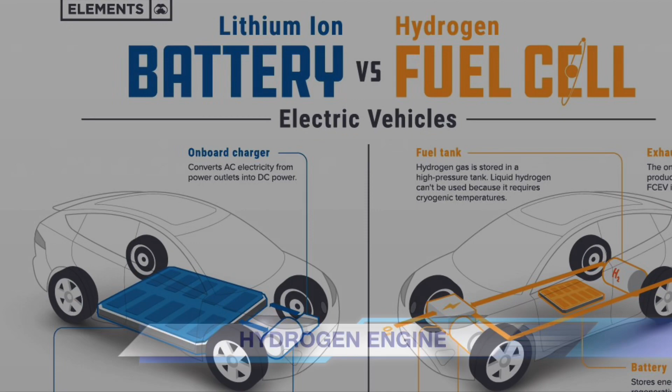Hydrogen engines, also known as hydrogen internal combustion engines (HICE), are a type of engine that uses hydrogen as its primary fuel source. These engines operate similarly to traditional internal combustion engines (ICE), but instead of using gasoline or diesel, they utilize hydrogen gas. A hydrogen vehicle is a vehicle that uses hydrogen fuel for motive power.

Hydrogen vehicles include hydrogen-fueled space rockets, as well as ships and aircraft. Power is generated by converting the chemical energy of hydrogen to mechanical energy, either by reacting hydrogen with oxygen in a fuel cell to power electric motors, or, less commonly, by burning hydrogen in an internal combustion engine.

The 2015 Toyota Mirai is the world's first mass-produced and commercially marketed dedicated hydrogen fuel cell vehicle that is not a modification of an existing model. The Mirai is based on the Toyota Fuel Cell Vehicle (FCV) concept car shown.

As of 2021, there are 2 models of hydrogen cars publicly available in select markets: the Toyota Mirai 2014, which is the world's first mass-produced dedicated fuel cell electric vehicle (FCEV), and the Hyundai Nexo 2018. There are also fuel cell buses.

Hydrogen aircraft are not expected to carry many passengers long-haul before the 2030s at the earliest.

As of 2019, 98% of hydrogen is produced by steam methane reforming, which emits carbon dioxide. It can be produced by electrolysis of water or by thermochemical or pyrolytic means using renewable feedstocks, but the processes are currently expensive. Various technologies are being developed that aim to deliver costs low enough and quantities great enough to compete with hydrogen production using natural gas.

Vehicles running on hydrogen technology benefit from a long range on a single refueling, but are subject to several drawbacks: high carbon emissions when hydrogen is produced from natural gas, capital cost burden, low energy content per unit volume at ambient conditions, production and compression of hydrogen, the investment required to build refueling infrastructure around the world to dispense hydrogen, and transportation of hydrogen.

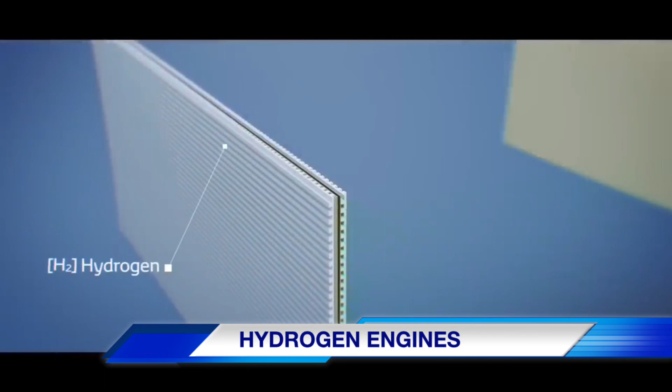A working toy model car runs on solar power, using a regenerative fuel cell to store energy in the form of hydrogen and oxygen gas. It can then convert the fuel back into water to release the solar energy.

Aeroplanes, hydrogen planes. The Boeing fuel cell demonstrator, powered by hydrogen fuel cell companies such as Boeing, Lange Aviation, and the German Aerospace Center, pursue hydrogen as fuel for crewed and uncrewed aeroplanes.

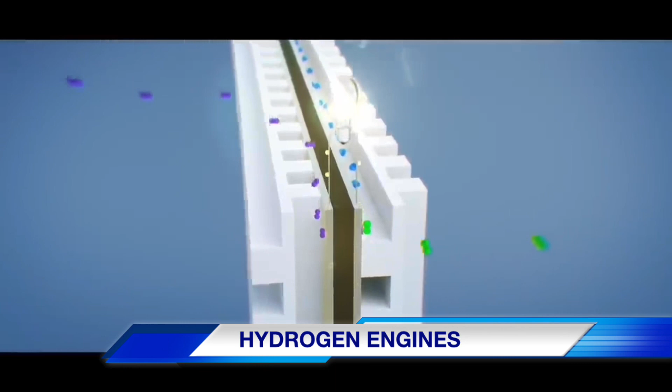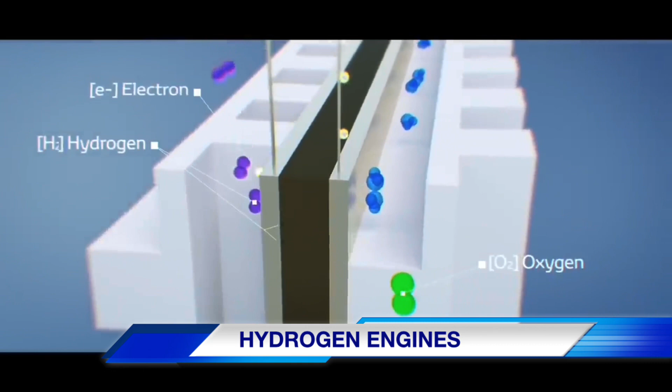In February 2008, Boeing tested a crewed flight of a small aircraft powered by a hydrogen fuel cell. Uncrewed hydrogen planes have also been tested. For large passenger aeroplanes, The Times reported that Boeing said hydrogen fuel cells were unlikely to power the engines of large passenger jet aeroplanes, but could be used as backup or auxiliary power units on board.

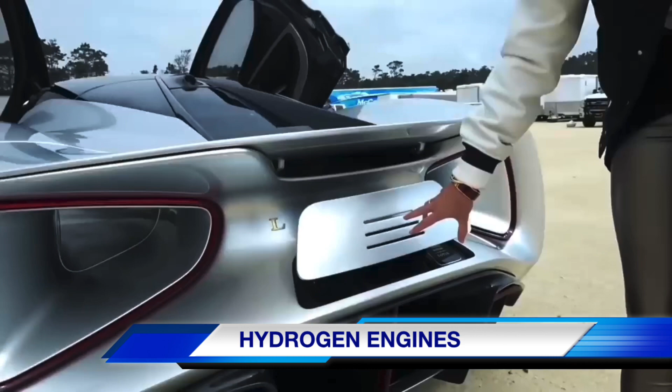In July 2010, Boeing unveiled its hydrogen-powered Phantom Eye UAV, powered by 2 Ford internal combustion engines that have been converted to run on hydrogen. In Britain, the Reaction Engines A2 has been proposed to use the thermodynamic properties of liquid hydrogen to achieve very high speed, long distance, antipodal flight by burning it in a pre-cooled jet engine.

Automobiles. As of 2021, there are 2 hydrogen cars publicly available in select markets: the Toyota Mirai and the Hyundai Nexo. The Honda Clarity was produced from 2016 to 2021. The first road vehicle powered by a hydrogen fuel cell was the Chevrolet Electrovan, introduced by General Motors in 1966.

The Toyota FCHV and Honda FCX, which began leasing on December 2, 2002, became the world's first government-certified commercial hydrogen fuel cell vehicles, and the Honda FCX Clarity, which began leasing in 2008, was the world's first hydrogen fuel cell vehicle designed for mass production, rather than adapting an existing model.

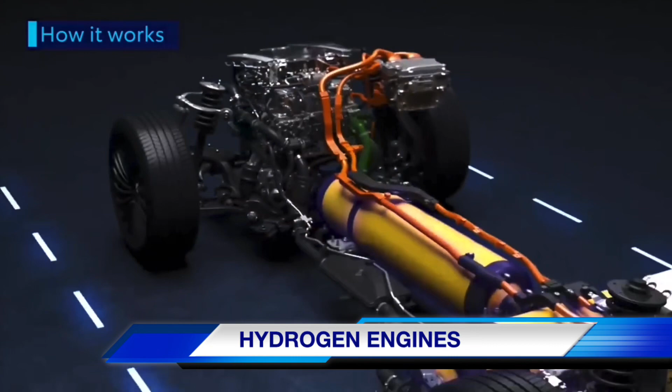Honda established the world's first fuel cell vehicle dealer network in 2008, and at the time was the only company able to lease hydrogen fuel cell vehicles to private customers.

The Hyundai Nexo is a hydrogen fuel cell-powered crossover SUV. The 2013 Hyundai Tucson FCEV, a modified Tucson, was introduced to the market as a lease-only vehicle, and Hyundai Motors claimed it was the world's first mass-produced hydrogen fuel cell vehicle.

However, due to high prices and a lack of charging infrastructure, sales fell far short of initial plans, with only 273 units sold by the end of May 2015. The Hyundai Nexo, which succeeded the Tucson in 2018, was selected as the safest SUV by the Euro NCAP in 2018.

Toyota launched the world's first dedicated mass-produced fuel cell vehicle, the FCV Mirai, in Japan at the end of 2014, and began sales in California, mainly the Los Angeles area, and also in selected markets in Europe: the UK, Germany and Denmark, later in 2015.

The car has a range of 312 miles (502 kilometers), and takes about 5 minutes to refill its hydrogen tank. The initial sale price in Japan was about 7 million yen ($69,000). Former European Parliament President Pat Cox estimated that Toyota would initially lose about $100,000 on each Mirai sold. At the end of 2019, Toyota had sold over 10,000 Mirais.

Many automobile companies have introduced demonstration models in limited numbers. In 2013, BMW leased hydrogen technology from Toyota, and a group formed by Ford Motor Company, Daimler AG and Nissan announced a collaboration on hydrogen technology development.

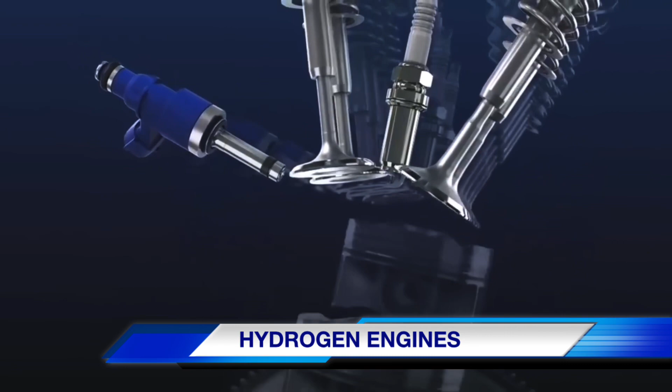In 2015, Toyota announced that it would offer all 5,680 patents related to hydrogen fuel cell vehicles and hydrogen fuel cell charging station technology, which it had been researching for over 20 years, to its competitors free of charge, in order to stimulate the market for hydrogen-powered vehicles.

By 2017, however, Daimler had abandoned hydrogen vehicle development, and most of the automobile companies developing hydrogen cars had switched their focus to battery electric vehicles. By 2020, all but 3 automobile companies had abandoned plans to manufacture hydrogen cars.

Auto Racing: a record of 207.297 miles per hour, 333.612 kilometers per hour, was set by a prototype Ford Fusion Hydrogen 999 fuel cell race car at the Bonneville Salt Flats in August 2007, using a large compressed oxygen tank to increase power.

The land speed record for a hydrogen-powered vehicle of 286.476 miles per hour, 461.038 kilometers per hour, was set by Ohio State University's Buckeye Bullet 2, which achieved a flying mile speed of 280.007 miles per hour, 450.628 kilometers per hour, at the Bonneville Salt Flats in August 2008.

In 2007, the Hydrogen Electric Racing Federation was formed as a racing organization for hydrogen fuel cell-powered vehicles. The organization sponsored the Hydrogen 500, a 500-mile race.

Buses: a fuel cell bus, a Solaris Urbino 12 bus near its factory in Boleslawiec, Poland. Fuel cell buses have been trialed by several manufacturers in different locations, for example the Ursus Lublin. Solaris Bus and Coach introduced its Urbino 12 hydrogen electric buses in 2019.

Several dozen were ordered. In 2022, the city of Montpellier, France, cancelled a contract to procure 51 buses powered by hydrogen fuel cells when it found that the cost of operation for hydrogen buses is 6 times the cost of electricity.

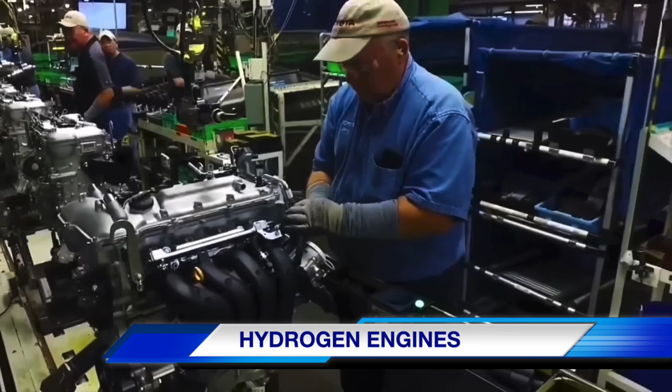Ships: as of 2019, hydrogen fuel cells are not suitable for propulsion in large long-distance ships, but they are being considered as a range extender for smaller short-distance, low-speed electric vessels, such as ferries. Hydrogen in ammonia is being considered as a long-distance fuel.

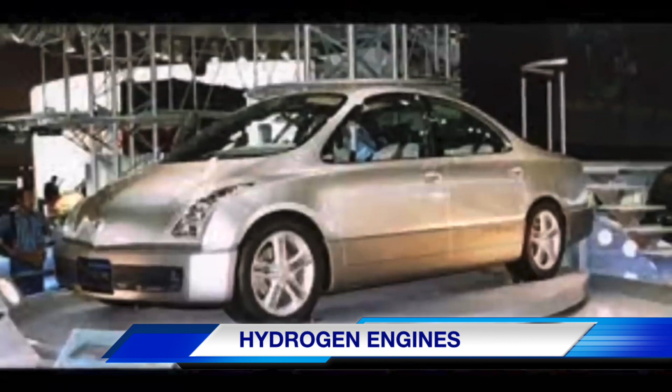Bicycles: the PHB Hydrogen Bicycle, 2007 - Pearl Hydrogen Power Source Technology Company of Shanghai, China, demonstrated a PHB hydrogen bicycle. In 2014, Australian scientists from the University of New South Wales presented their Hy-Cycle model. The same year, Canyon Bicycles started to work on the EcoSpeed concept bicycle.

In 2017, Pragma Industries of France developed a bicycle able to travel 100 kilometers on a single hydrogen cylinder. In 2019, Pragma announced that the product, Alpha Bike, had been improved to offer an electrically assisted pedaling range of 150 kilometers, and the first 200 bikes were to be provided to journalists covering the 45th G7 summit in Biarritz, France.

Lloyd Alter of Treehugger responded to the announcement, asking why go through the trouble of using electricity to make hydrogen, only to turn it back into electricity to charge a battery to run the e-bike, or pick a fuel that needs an expensive filling station that can only handle 35 bikes a day, when you can charge a battery-powered bike anywhere.

If you were a captive fleet operator, why not just swap out batteries to get the range and the fast turnover?

Military Vehicles: General Motors Military Division, GM Defense, focuses on hydrogen fuel cell vehicles. Its SURUS, Silent Utility Rover Universal Superstructure, is a flexible fuel cell electric platform with autonomous capabilities.

Since April 2017, the U.S. Army has been testing the commercial Chevrolet Colorado ZH2 on its U.S. bases to determine the viability of hydrogen-powered vehicles in military tactical mission environments.

Motorcycles and scooters: companies develop electric motorcycles powered by a hydrogen fuel cell, including the Crosscage and Biplane. Other manufacturers such as Vectrix are working on hydrogen scooters.

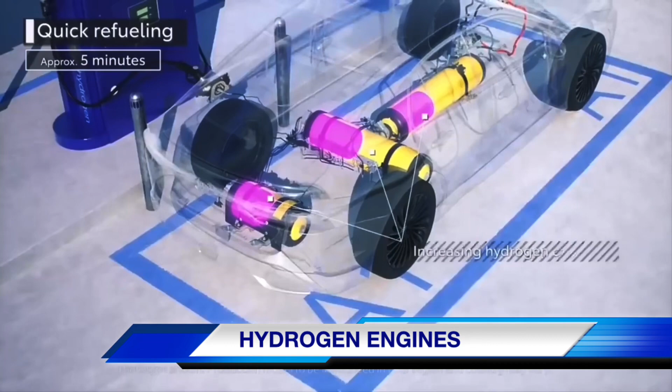Finally, hydrogen fuel cell electric hybrid scooters are being made, such as the Suzuki Burgman Fuel Cell Scooter and the FHybrid. The Burgman received whole vehicle type approval in the EU. The Taiwanese company APFCT conducted a live street test with 80 fuel cell scooters for Taiwan's Bureau of Energy.

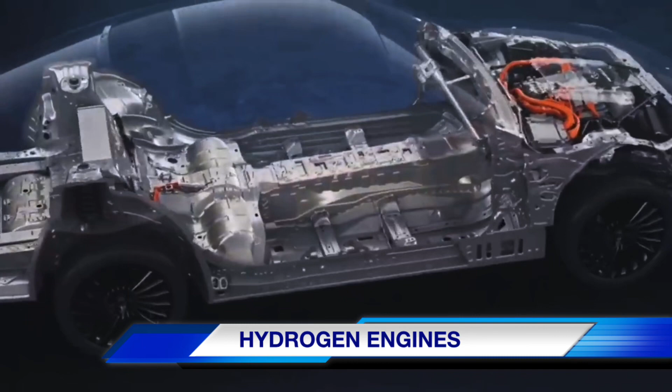In 2013, there were over 4,000 fuel cell forklifts used in material handling in the US. The global market was estimated at 1 million fuel cell-powered forklifts per year for 2014-2016. Fleets are being operated by companies around the world. Pike Research stated in 2011 that fuel cell-powered forklifts will be the largest driver of hydrogen fuel demand by 2020.

Most companies in Europe and the US do not use petroleum-powered forklifts, as these vehicles work indoors where emissions must be controlled, and instead use electric forklifts. Fuel cell-powered forklifts can provide benefits over battery-powered forklifts, as they can be refueled in 3 minutes. They can be used in refrigerated warehouses, as their performance is not degraded by lower temperatures. The fuel cell units are often designed as drop-in replacements.

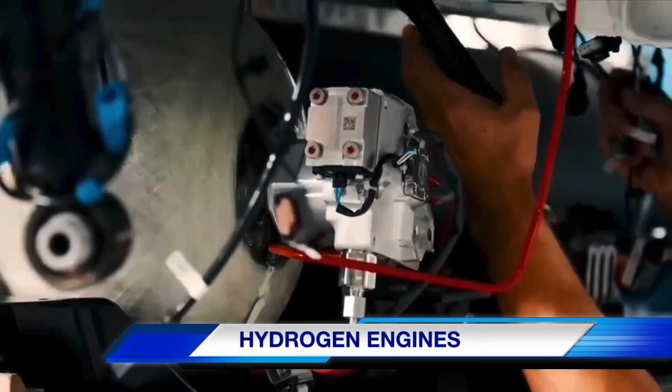Rockets: The Centaur rocket stage was the first to use liquid hydrogen. Many large rockets use liquid hydrogen as fuel, with liquid oxygen as an oxidizer, LH2/LOX. An advantage of hydrogen rocket fuel is the high effective exhaust velocity compared to kerosene/LOX or UDMH/NTO engines. According to the Tsiolkovsky rocket equation, a rocket with higher exhaust velocity uses less propellant to accelerate. Also, the energy density of hydrogen is greater than any other fuel, and LH2/LOX yields the greatest efficiency in relation to the amount of propellant consumed of any known rocket propellant.

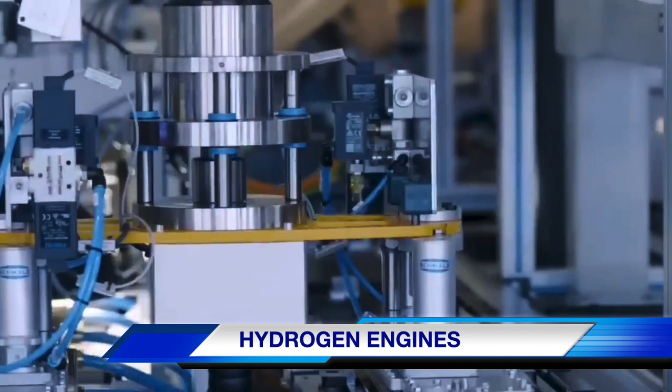A disadvantage of LH2/LOX engines is the low density and low temperature of liquid hydrogen, which means bigger, insulated, and thus heavier fuel tanks are needed. This increases the rocket's structural mass, which reduces its delta V significantly. Another disadvantage is the poor storability of LH2/LOX powered rockets. Due to constant hydrogen boil-off, the rocket must be fueled shortly before launch, which makes cryogenic engines unsuitable for ICBMs and other rocket applications that need short launch preparations.

Overall, the delta V of a hydrogen stage is typically not much different from that of a dense fueled stage, but the weight of a hydrogen stage is much less, which makes it particularly effective for upper stages, since they are carried by the lower stages. For first stages, dense fueled rockets in studies may show a small advantage due to the smaller vehicle size and lower air drag.

LH2/LOX were also used in the Space Shuttle to run the fuel cells that power the electrical systems. The byproduct of the fuel cell is water, which is used for drinking and other applications that require water in space.

Heavy Trucks: United Parcel Service began testing of a hydrogen-powered delivery vehicle in 2017. In 2020, Hyundai began commercial production of its Xcient fuel cell trucks and shipped 10 of them to Switzerland. In 2022 in Australia, 5 hydrogen fuel cell Class 8 trucks were placed into use to transport zinc from Sun Metals' Townsville mine to the port of Townsville, Queensland, to be shipped around the world.

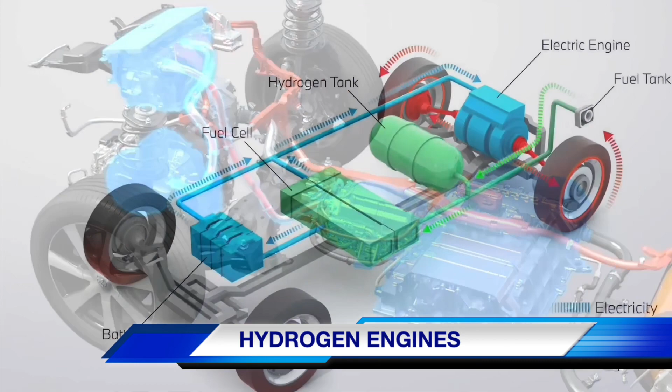Here are some key points about hydrogen engines. Fuel combustion: hydrogen engines combust hydrogen fuel with oxygen from the air, generating mechanical power. The combustion process typically produces water vapor as the only byproduct, making hydrogen engines potentially cleaner in terms of emissions compared to traditional combustion engines.

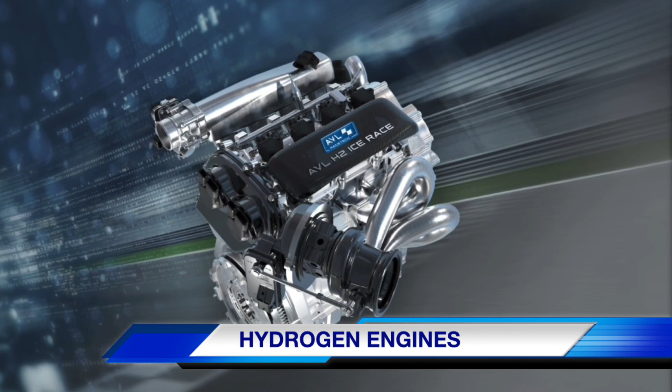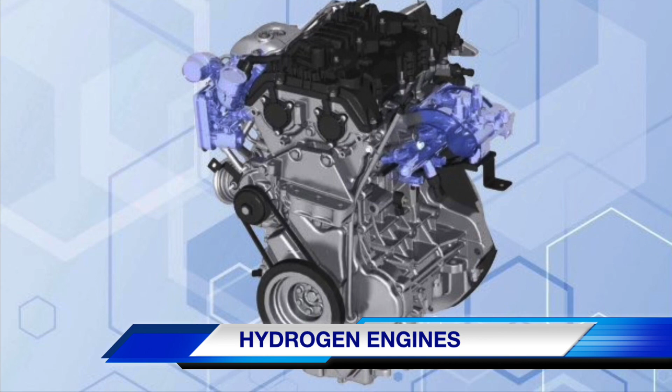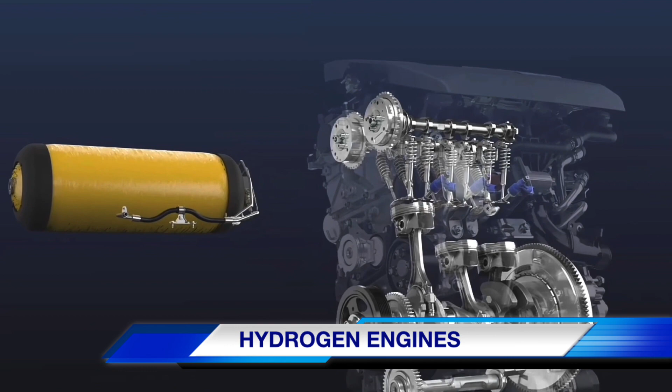Operation: hydrogen engines function by mixing hydrogen gas with air in the engine's combustion chamber. The mixture is ignited, leading to combustion and the expansion of gases, which in turn drives the engine's pistons and creates mechanical energy. Fueling infrastructure: hydrogen engines require a dedicated hydrogen fueling infrastructure to supply the hydrogen fuel. This infrastructure is currently less widespread compared to gasoline or diesel fueling stations, limiting the widespread adoption of hydrogen engines.

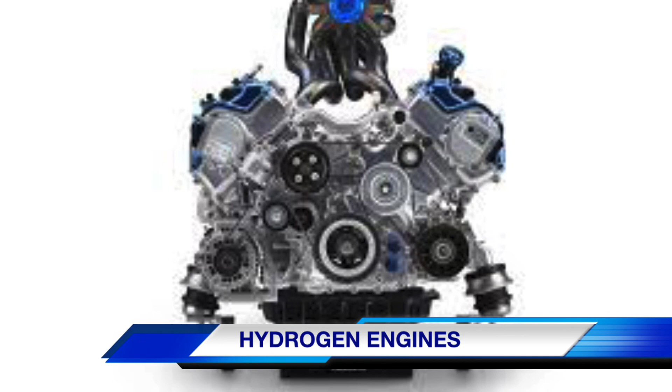Advantages: hydrogen engines have several potential advantages. Hydrogen is a high-energy fuel that can be produced from diverse sources, including renewable energy, making it a potentially sustainable option. Hydrogen engines can also offer low emissions if the hydrogen is produced using renewable energy sources.

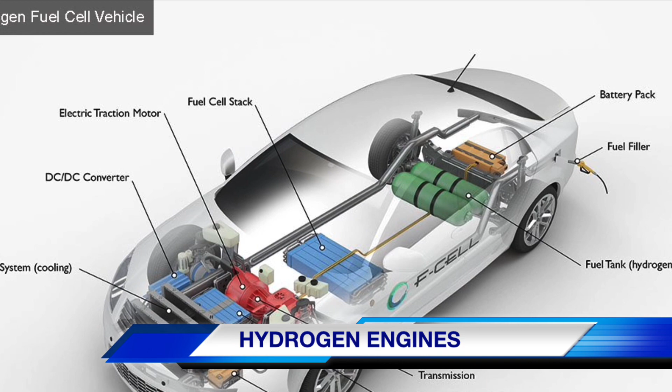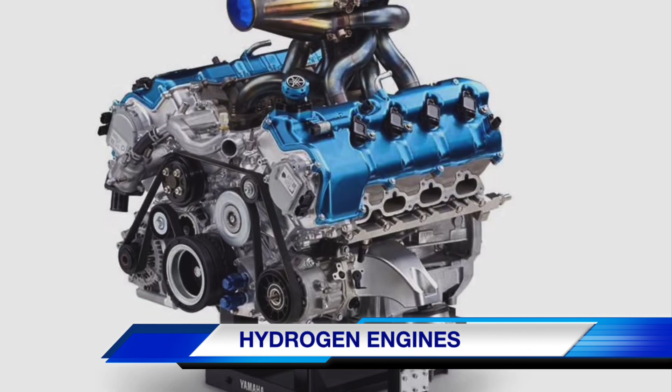Challenges: there are also challenges associated with hydrogen engines. One significant challenge is the production, storage, and transportation of hydrogen fuel. Hydrogen is a relatively low-density gas and requires compression or liquefaction for practical storage and transportation, which adds complexity and cost to the infrastructure. Additionally, hydrogen engines may require modifications compared to traditional combustion engines due to the different properties of hydrogen as a fuel. It's worth noting that technology and research in the field of hydrogen engines are continuously evolving.